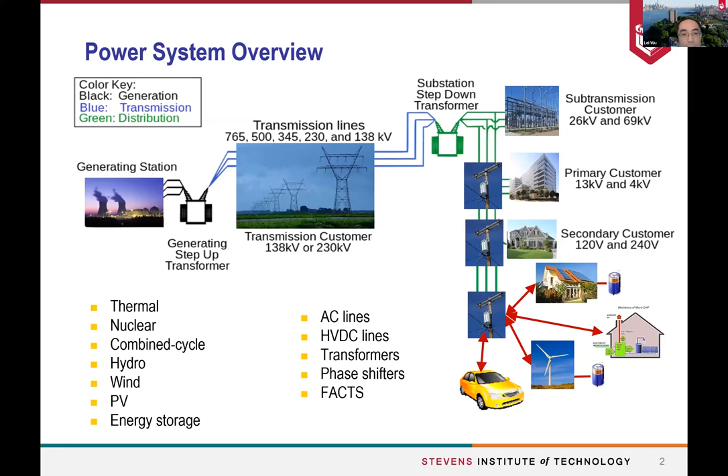So within this big picture, our group is trying to understand the challenges and see how we can make better decisions to manage this big system. If we look at the big picture for the power system, usually we are looking at several different problems in different time dimensions. In the longer time dimension, annually based, we are looking at the planning problem: where and how many renewables we want to put in different locations.

And moving downward, on a monthly basis, we will look at some of the maintenance and fuel contracts, those things. And moving further, we are looking at the day-ahead, hour-ahead, and minutes-ahead based schedule. This schedule will determine, for example, which generator needs to be turned on and how much electricity in terms of megawatts will be generated to supply the load. And the last one, usually we are looking at the second, millisecond level to do the real-time control of the system, to make sure of the security of the operation.

So when we look at this entire time chain, we are facing several different types of complexity. The first one is the temporal complexity, as we explained here. When we look at annually based decision making all the way down to second based, there is a wide range of time span you have to cover, and how to coordinate these different decisions made at different times. A second challenge is called the spatial complexity, because we are looking at a bigger system that crosses many states or even many countries. So we have transmission and distribution. So this is the spatial complexity as well.

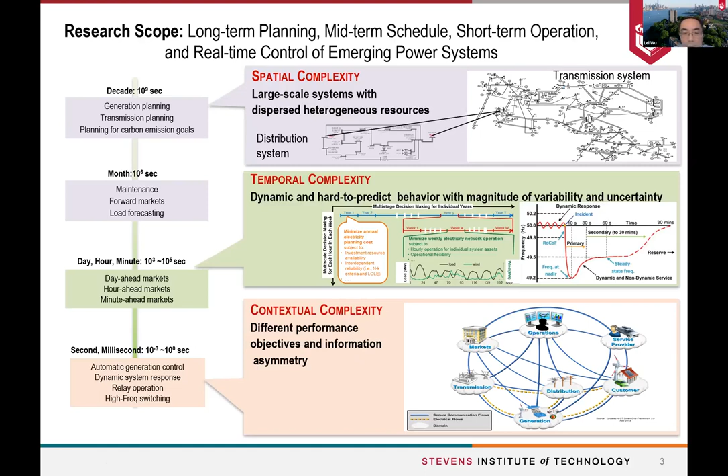One of the good things is that from the mathematical point of view, we can probably formulate all these different problems in one form or the other. In general, we can formulate them as some type of optimization problem like this, either linear or nonlinear. For some of the problems, we are going to solve a system of nonlinear equations to get a solution of X. And sometimes we are dealing with differential equations. So this is a system of equations.

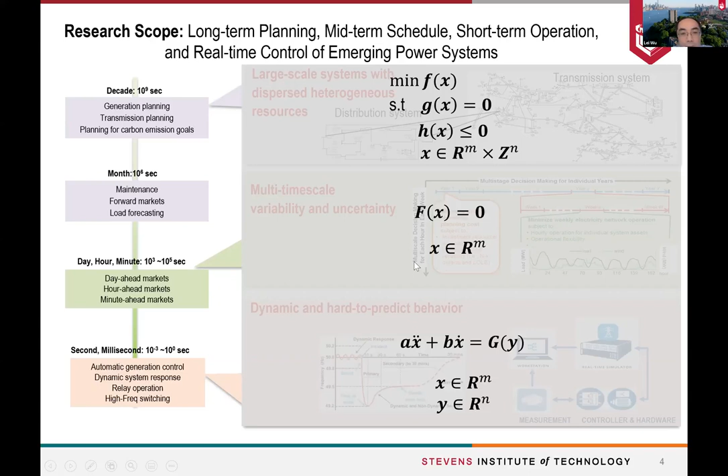So the steps to solve the problem will be first how we can abstract from the physical system to build our mathematical model, and then how we can effectively solve this model to get a solution and apply it to the system. So the first thing, in terms of the modeling part, we always want to build a more accurate model in order to map to the actual power system. But if you get a finer model, probably your solution time will be much longer, not acceptable. So here I give a very brief example of a typical generation plant.

So this is a combined cycle unit. Basically, in one combined cycle unit, we may have several combustion turbines and steam turbines. They use the combustion turbine to convert from gas to electricity, and they can also collect the waste heat to generate further electricity in a second stage to improve the overall efficiency.

But since this covers several turbines, if we operate this entire power plant we are facing several different operation modes: how many combustion turbines we are going to turn on and how many steam turbines we are going to turn on. So this is not a single unit. Basically, it's a couple of multiple turbines to coordinate together.

So from the mathematical point of view, we may need to simulate many different operation statuses and see which one will be the best. And again, this will be a leverage in terms of the modeling accuracy and the complexity you may be facing at a later time when you solve the problem.

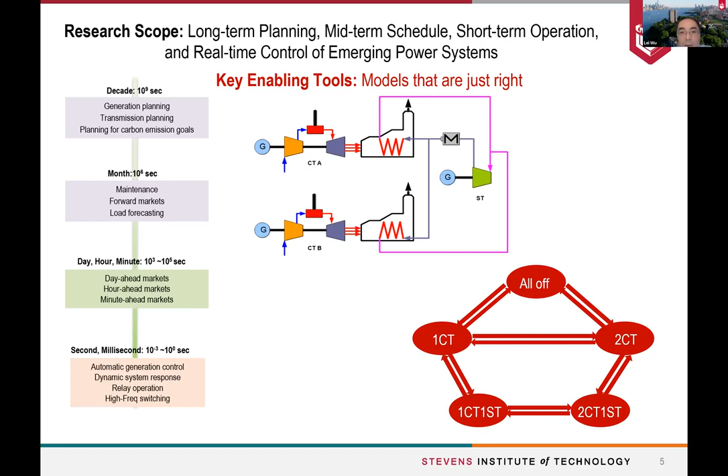The second major thing we are looking at is from the algorithm point of view. We always try to solve the models as quick as possible. So here I try to present this idea. The first attempt, usually we are going to solve the problem ahead of time, which means that if we want to get a solution at time t, we probably need to prepare for this solution 5 or 10 minutes ahead of time.

So we need to forecast some states of the system at t, and we use this delta t time to make the decision so that the decision can be applied to the physical system when t comes. So we call it ahead of time. The next step is whether we can do it in a better way, meaning whether we can shorten this delta t time. We call it near real time.

This means that if the time is shortened, we can get a better forecast value. It's a general sense that if time is closer, we can probably increase the accuracy of the forecast. This will give you a better solution, but it depends on how fast you can solve the problem. If you can solve it faster, you can get a better solution at time t, mainly because you can improve the forecast accuracy of the system state at time t.

And the last try, we are trying to make this near real time even better. We call it faster than real time. The basic idea is that if we can solve the problem even faster, we are not only going to determine the solution at time t, we are also going to expand the system simulation from t to a near future.

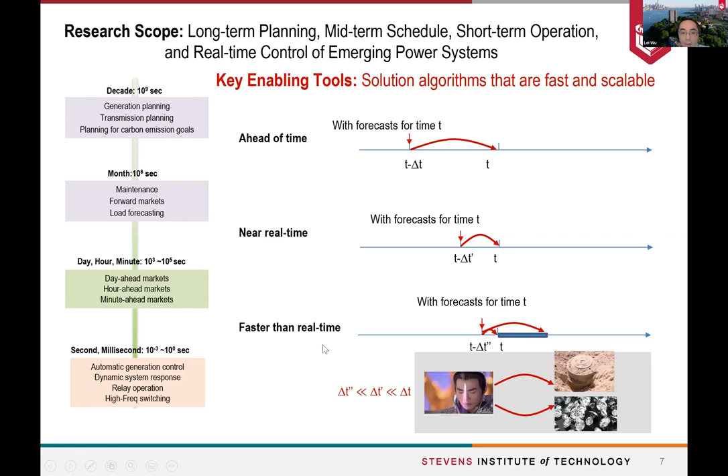So these are some of the attempts we are making to address the computational challenge. Mathematically, once we have these models, we are trying to make the computational time faster and faster. So we tried different mathematical optimization algorithms. We dug into some parallel and cloud computing solution platforms. And we also studied some artificial intelligence and machine learning based approaches, trying to combine all this together to achieve our goals in computational performance.

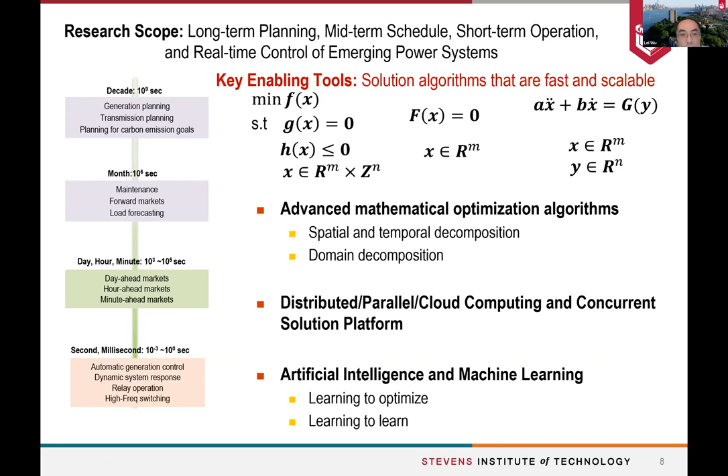And the third thing we are trying to do is go back to this time chain we are looking at. So the current strategy in the power industry, and probably in many other industries, is that they make these time-dependent decisions in a sequential way. So they do the planning, and then based on the planning decision, they do the monthly, and they do the daily, they do the second-based. So one of the consequences is that this is a kind of open-loop decision-making procedure.

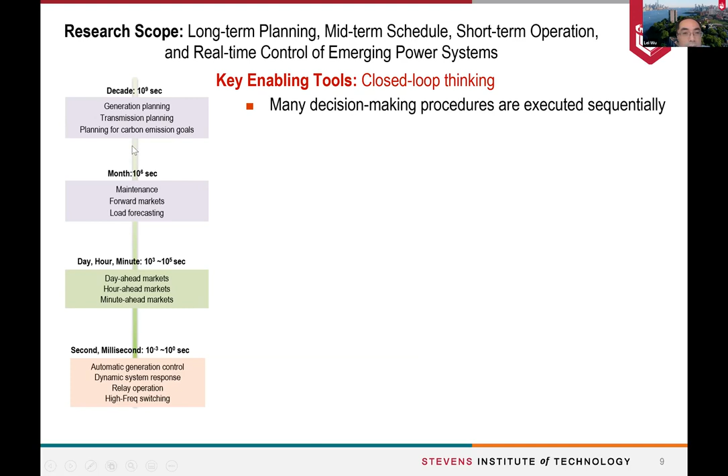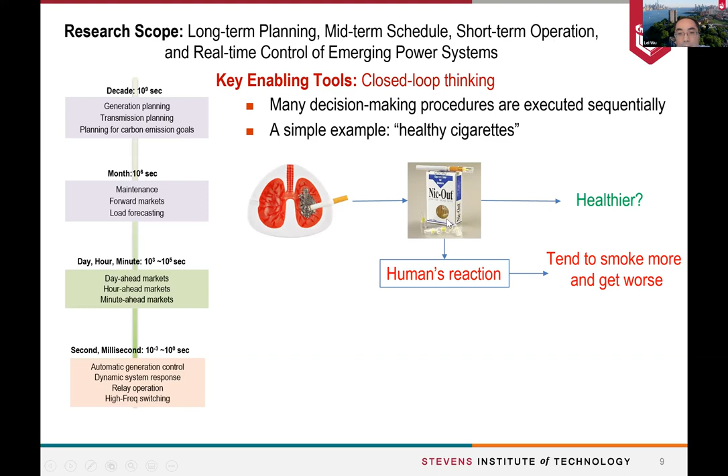But if we do this open-loop decision making, the consequence may not be what we expect. The reason is that people, seeing that cigarettes are becoming healthier, try to smoke more, and probably they get worse, even worse than before. So in order to close the loop of this system, what we probably should do is evaluate the different technologies or solutions, and simultaneously evaluate how the people will react to these solutions and technologies, make the closed-loop decision, and the final technology you find out shall be able to improve the healthy life of our people.

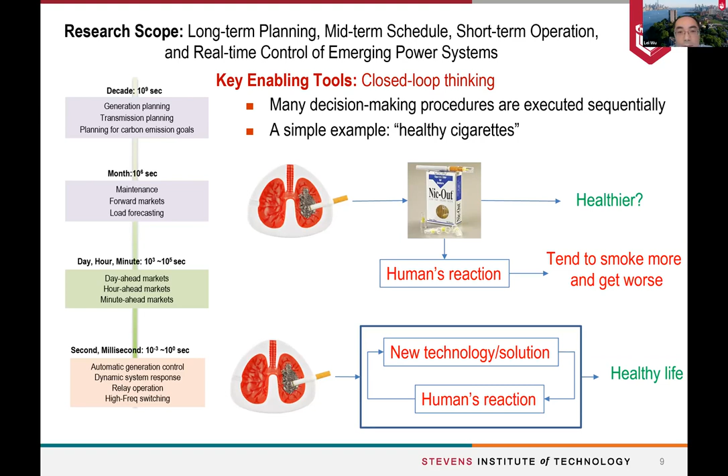So the same thing, when we make the long-term decision, we want to close the loop so that the entire decision procedure will be better, not only for the annual-based, but also for the day-ahead and even the second-based decision-making procedure. So these are basically the three major aspects our research team has been looking at.

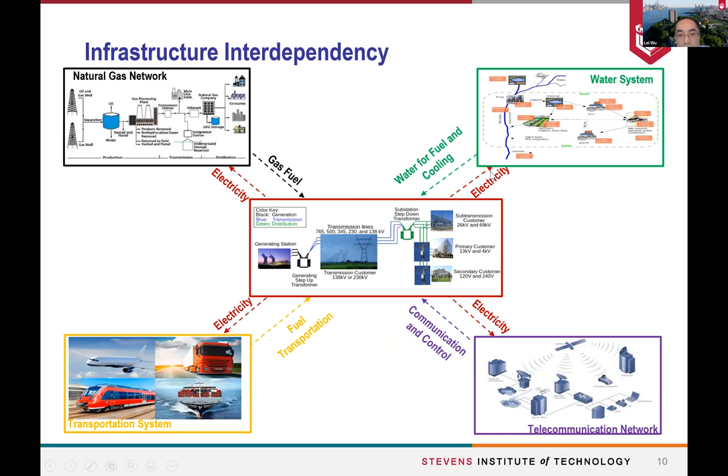So the last thing I want to briefly mention here is, besides the power system, we are also looking at some of the interdependency issues. So actually, the power system is highly interdependent with many other infrastructure systems. For example, the gas, the water system, the transportation, and the communications, supporting them and also relying on them for its own support. This is my last slide.

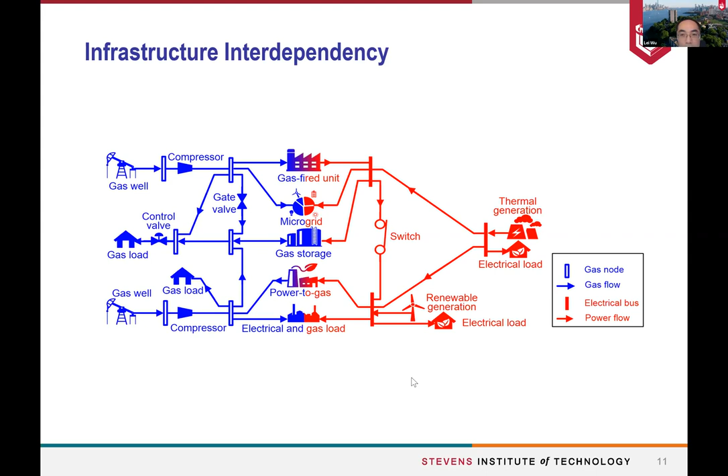Great, and also there's another question, maybe the last question. Would you mind? Yeah, the last one is, has your research considered the cybersecurity concerns within the interdependent systems? Yeah, I am currently working with several faculty within our department. So one of the projects we are looking at is IoT-based cyber attacks, how they will impact the security of the smart grid or power systems.